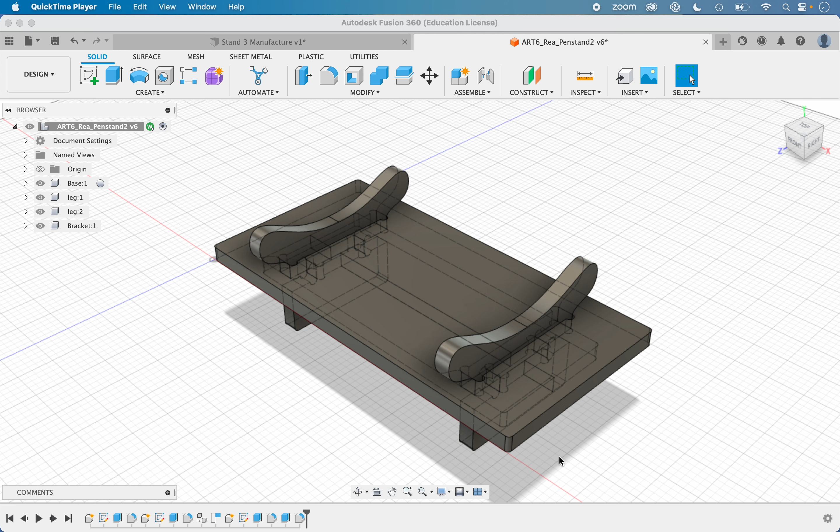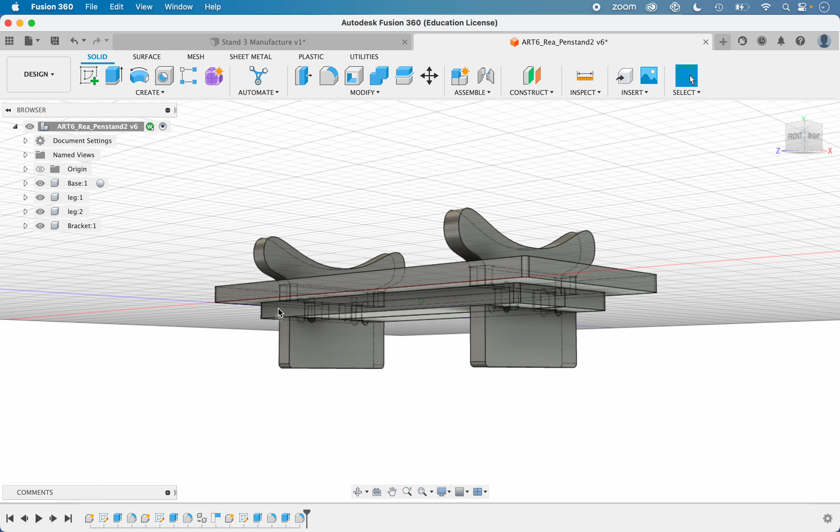Hello 3D modelers. In this video we're going to work on taking each of these bodies in this pen stand and move them so that they are coplanar to get ready for manufacture using the CNC router. First, let's activate the layer for these brackets underneath. If I click on it, you see these blue hash marks indicate which component we want to be working with, so I'll make that active.

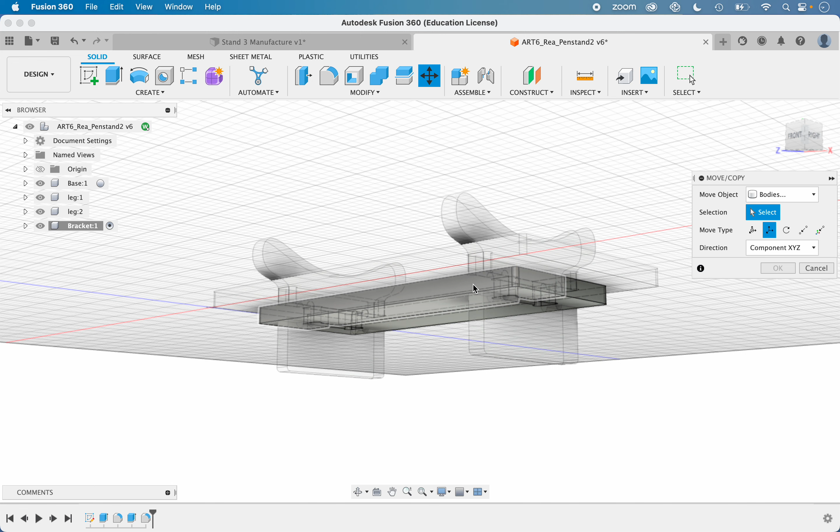I'll hit M for move. Over here we want to choose bodies, and we'll select first this body, using a point-to-point move. We want to take this point here and move it up to that point there. Now that body is coplanar with this one. We'll say okay.

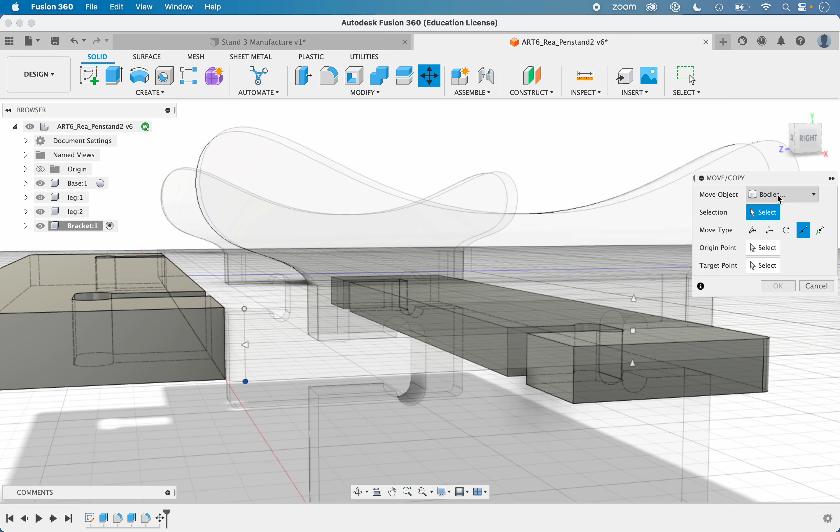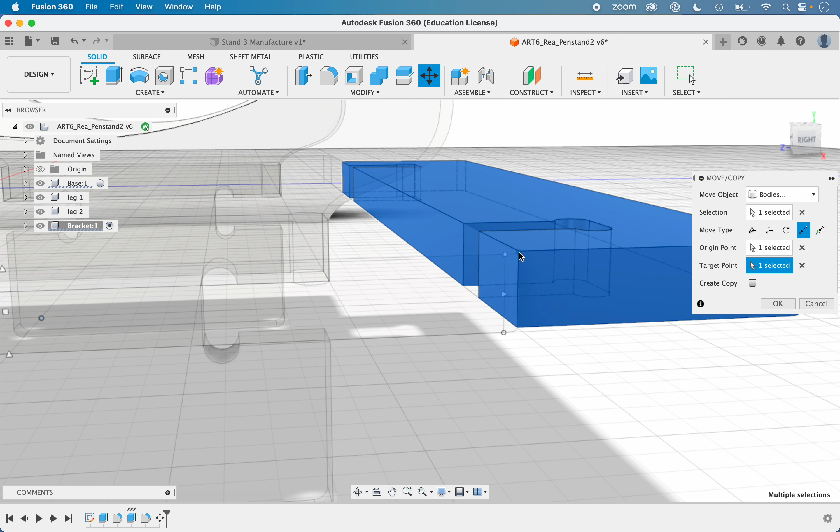Let's do that again. M for move, and it repopulated bodies, so this time we want to move this body. It retained point to point. We want the origin point to be this one under here, and we want it to move up here. Now we have that body coplanar, so we'll say okay. Let's take a look at this from a distance and notice we have these two end stands or cradles.

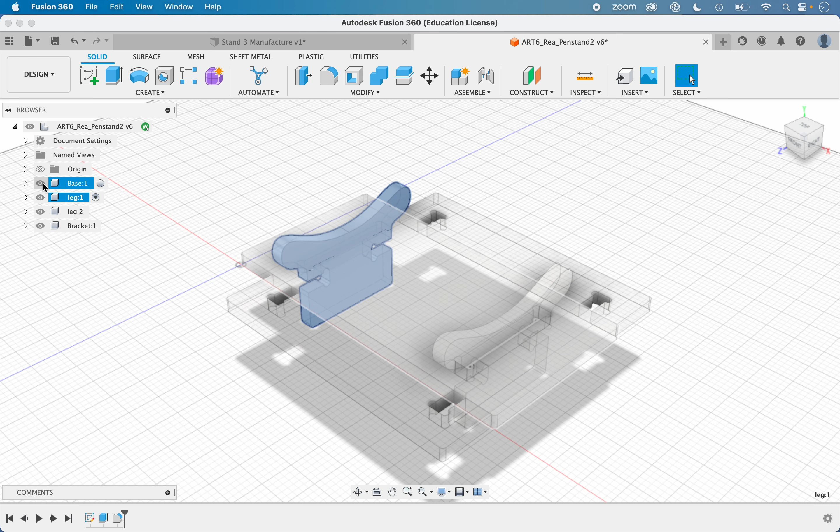This is leg one. We'll go over here and activate that, and let's move it. This one is going to take some rotation as well. To help us do this more easily, I'm going to turn off the visibility of the other two components for the moment. M for move, this time we'll move the body. This is the body we want to move, and we want to use rotation. The axis we want to rotate around is this one here, and it provides this arc.

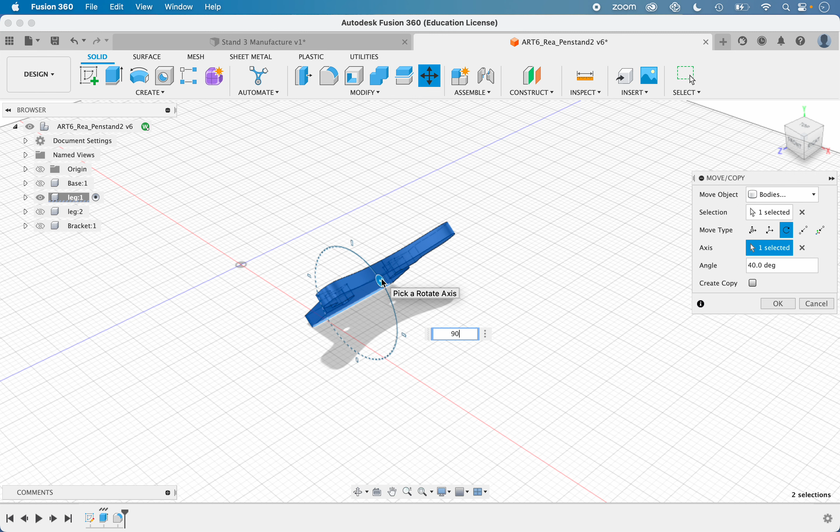We can start the move, and once it's begun, we can go ahead and type in 90 degrees. So that's what we want there. Then let's turn the base back on because we're going to do the next move, which is to make this body come up coplanar with the base.

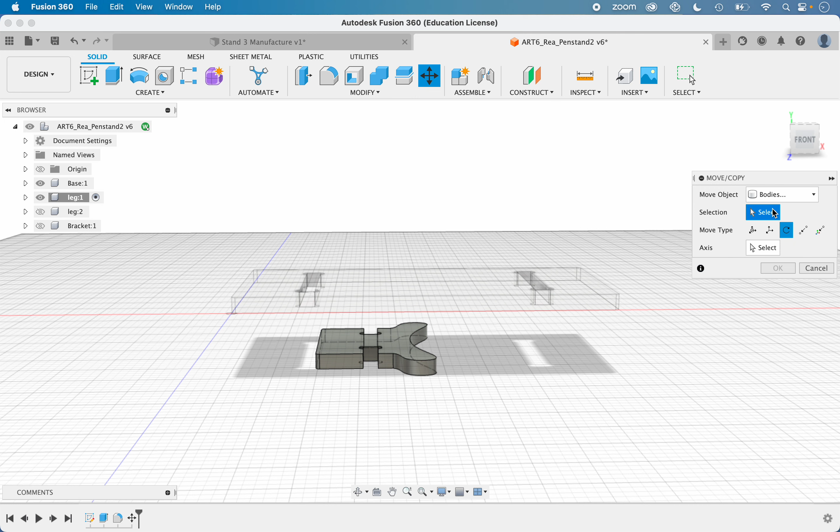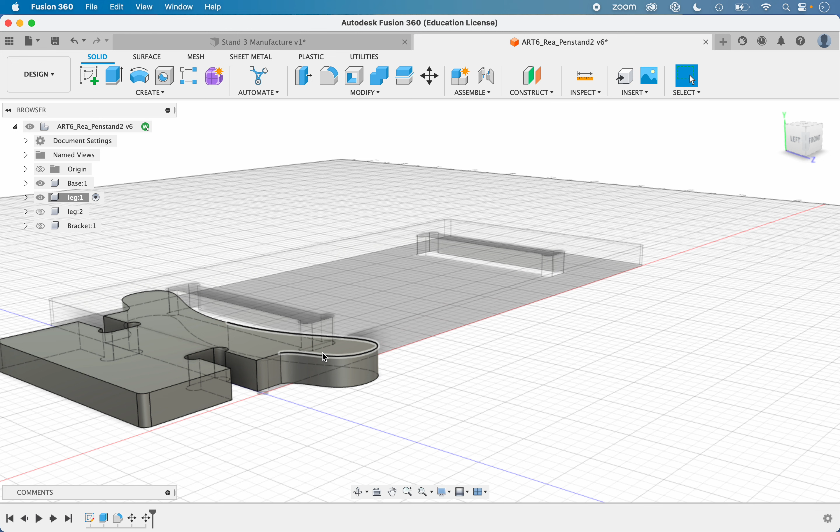We'll hit M for move. It repopulated bodies. We want to move this body, this time from point to point. The origin point, I'm going to go in here and select this origin point here, and we'll bring it up to that point there. I did that, let me hit okay. I did that so that this body is sort of hanging out.

They're co-located, meaning digitally or mathematically they're sharing the same space right now, but this will be easy to grab later. Then let's make leg number 2 visible. This shows us that because I pasted these, I did not paste new. What I did to leg 1 repeated in leg 2. So that means anytime I move one, the other one is going to move similarly, which will determine how close we can arrange things.

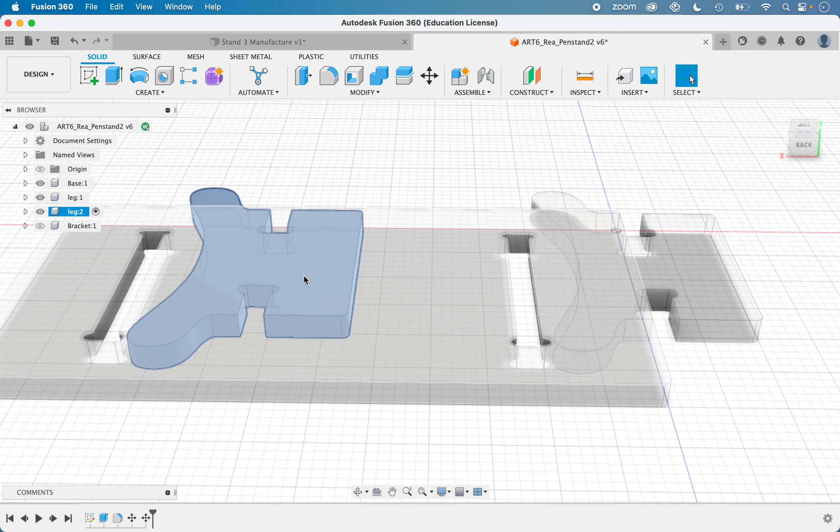Now let's go back up to the top level, make everything active, click away here, and let's make sure we have everything turned on. We'll look at this from the top, and start giving some little space because there's not enough space for the machine end mill to be working in here, so we need to give ourselves a little more space.

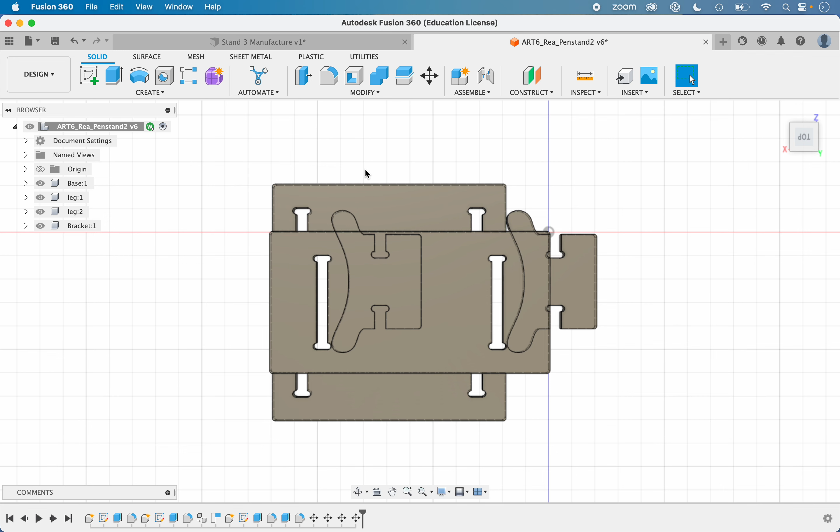I'll activate the bracket. Let's go in and move the first one and give ourselves some space. M for move. Which body do I want to move? This body. How do I want to move it? I want to use translate, and let's just move this up. It's given me this space here. I'm going to type in 0.5 inches, so now I have a half inch between the bracket and the base.

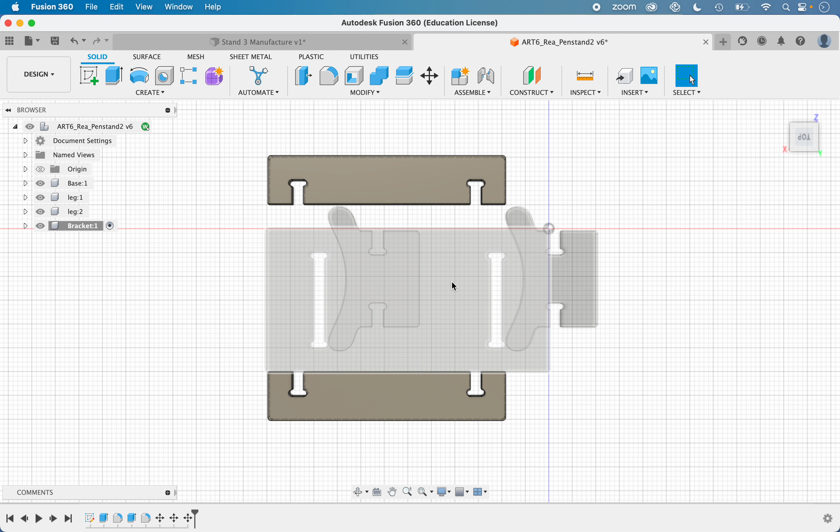We'll do that one more time down below, selecting this body. It's already got translate. I'll start pulling with the arrow, but I'll just end up typing 0.5. Excellent. All right, now let's see what we can do with these two.

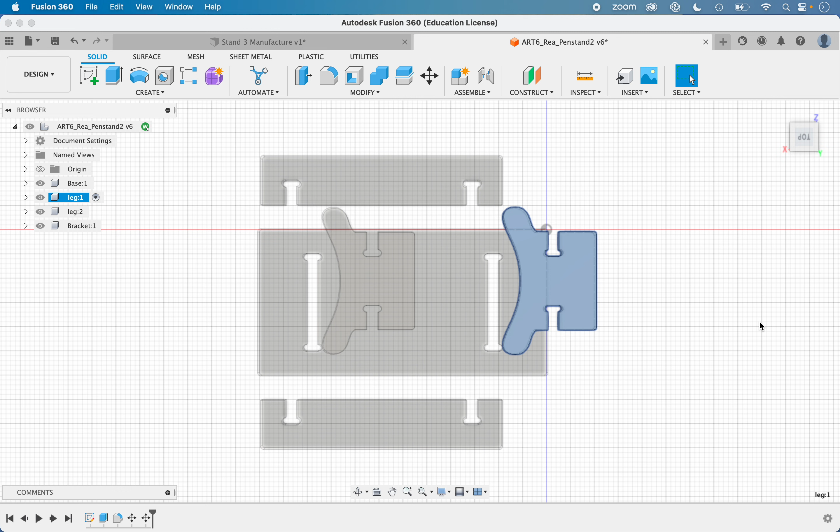This is leg 1, and we'll hit M. We want to move the body. I will select it, it's got translate, and it's going to be moving those just like that. So I'll position them in between the brackets.

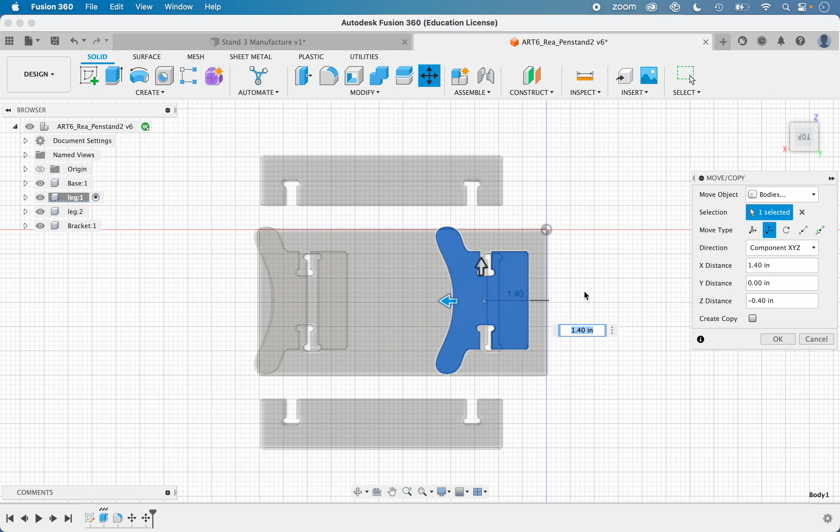Finally, let's go activate the base. M for move with the base. Oh, I want to make sure this says bodies. Select the body, it is in translate. I'm going to move this up here.

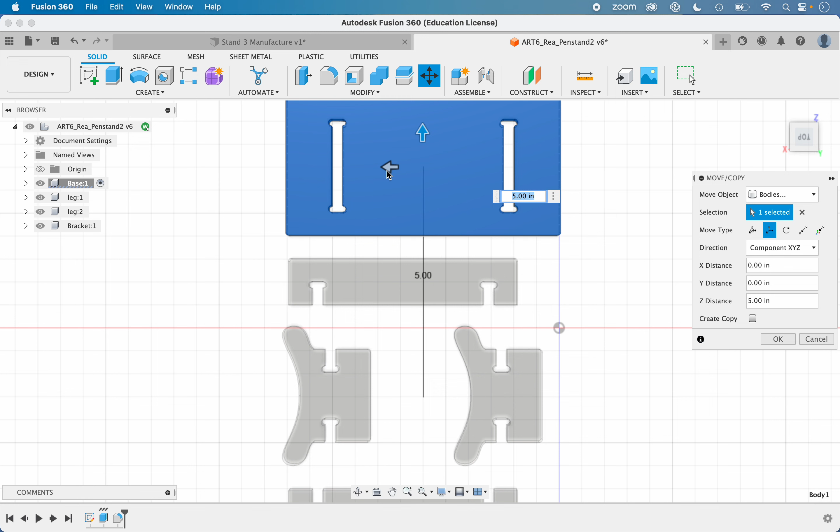Yes, and I'm just, let's see. Yeah, I like this. Even though it's overhanging over here, this makes a nice even line. So I think that's going to be a good arrangement to cut out on the CNC router. In the next video, we'll work on defining the tools and setting up the paths the tools will take. See you there.